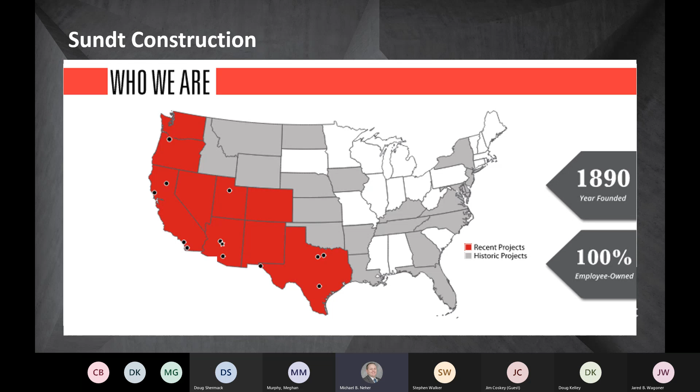Another tidbit about Sundt is that we are 100% employee owned. That's not just administrative personnel, but also down to our self-performed craft. All of our craft folk are also employee owners of the company.

Going through the agenda: first we'll go over the safety share. One of Sundt's primary goals and main attributes we pride ourselves in is our safety program, so we start off every meeting with a safety share, hoping to bring you something you've maybe not heard before. We'll do a project overview to give everyone a download of what the project is, go over the project schedule, the bid schedule and bidding opportunities related to today's topics, instructions to bidders and exhibits and attachments that will go out at bid time. We'll briefly discuss the best value approach, since a few scopes on the project are best value instead of low bid. We'll go through seismic design requirements and delegated design, then a detailed review of divisions 4 through 14 as well as 41, and then open up the forum for questions and answers at the end.

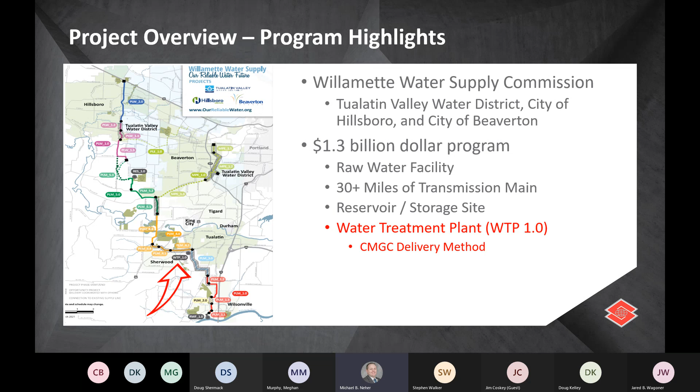An important fact about this project is that one of its main purposes is to provide a seismically resilient design to withstand a major seismic event. So in the event of a large earthquake, this plant is to remain operational, or able to resume operation within a very short period of time, ensuring that we have clean water being distributed to the public. This location was strategically chosen due to the stable basalt or granite bedrock that exists in this area.

So for any trades that have to do work in the ground, excavations or anything like that, blasting will most likely be required, and that's all reflected within the geotechnical report as well as the contract documents. This is a greenfield site, heavily forested, so one of the first things the civil contractor will have to do is deforest everything, getting all the vegetation out of the area to make way for our new structures.

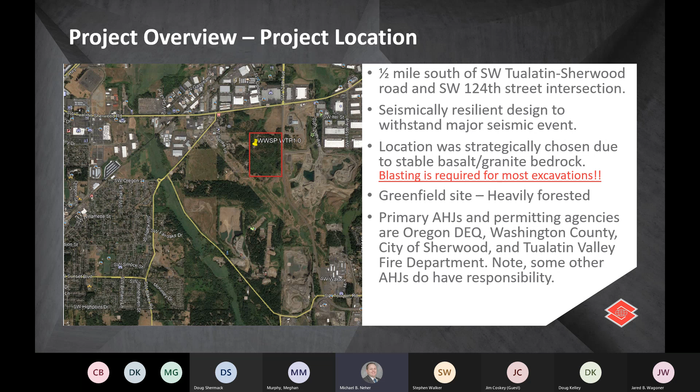The primary AHJs, or authorities having jurisdiction, and permitting agencies involved with this project are the Oregon DEQ, Washington County, City of Sherwood, Tualatin Valley Fire Department, and others. I just want to point out that there are some other AHJs that also have responsibility with this project, but you can see there are quite a few entities involved that we need to make sure we're accommodating.

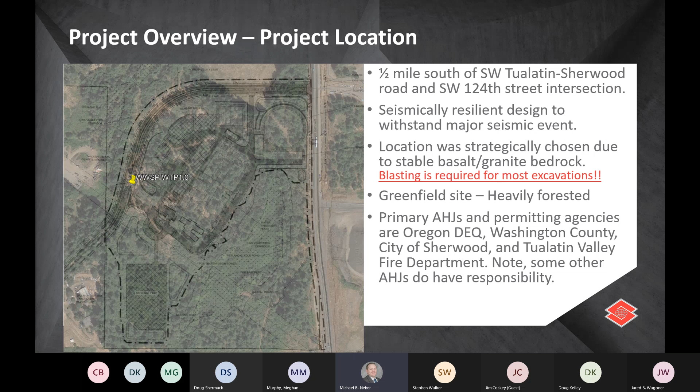So the project site overview. On the slide shown earlier, this is really the meat and potatoes of the project. Like I said, it's a greenfield site, approximately 23 acres that will have to be cleared and built out. There are multiple treatment areas, and there exists a 15,000 square foot administration building with Class A office finishes.

There's approximately 40,000 cubic yards of structural concrete being placed on the project. Earthwork quantities include 65,000 cubic yards of cut and fill on the job, 180,000 cubic yards of structural excavation, and 120,000 cubic yards of pipe excavation. As mentioned earlier, all of that has to be drilled and blasted to remove that material.

There is about $20 million of process equipment that will be purchased by Sundt and then turned over to the installing contractor to install—that's the large round structure in the picture. There is also the clear well, a 10 million gallon pre-stressed concrete reservoir.

There are multiple pre-engineered metal buildings on the campus, which in all of this scope provides multiple building trade opportunities for basically the scopes that we're talking about today, 4 through 14 and 41.

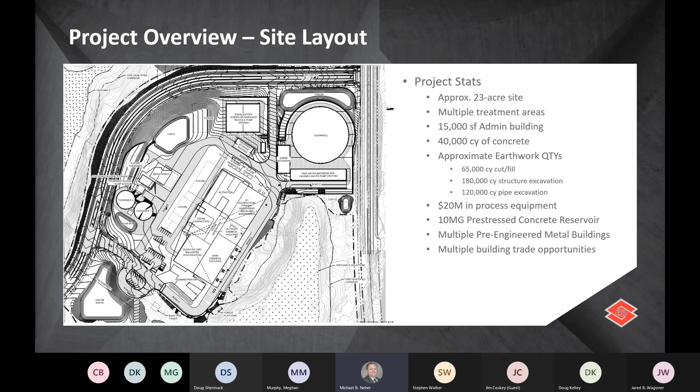Zooming in a little bit more, this is the main process structure. It's the largest structure on site and incorporates multiple processes under one roof, I would say. It's all one connected structure.

On the far left-hand side there is the administration building. As I mentioned earlier, it's a Class A office space that incorporates a locker room, showers, a laboratory, meeting rooms, office spaces. The structure itself is a structural steel skeleton with metal siding and metal roofing, and it also has solar panels on top of the metal roofing.

On the bottom in the center there, the main chemical area, that is where all the main chemicals are stored for the project, and from there it's distributed throughout the campus. Chemicals are used for different parts of this process.

The outdoor chemical facility, again, is just another area where chemicals, basically the liquid oxygen and other gaseous chemicals, are stored there and then distributed from there.

Up in the upper left-hand corner, right next to the administration building, is the ballasted floc. This is the first structure where the water from the Willamette River will come into, and from there chemicals are added to be able to segregate out solids, as we call it, within the water.

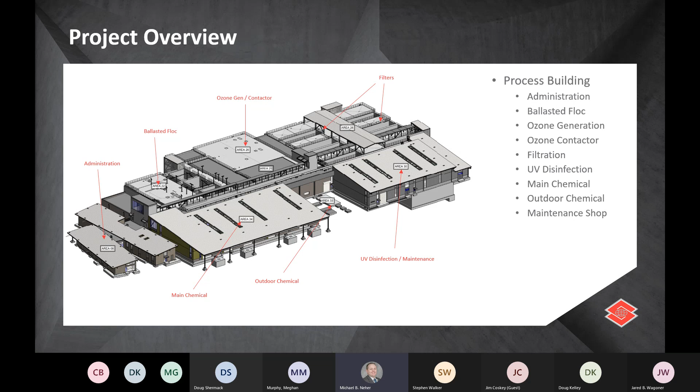And then from there, it goes into the UV disinfection. Again, this goes through UV bulbs where UV light is cast across the water, and that UV process again helps with disinfection.

This picture shows the same 4 structures, just from a different point of view. So I'm going to talk specifically on the left picture here. On the bottom center there is the equalization overflow basin. This is really 2 concrete boxes buried in the ground. There is no lid on it, so it's open to the air, but really it's meant to hold finished water in there to be able to help equalize the system as a whole.

On the right-hand side is the equipment storage building. That is one of the pre-engineered structures, and really it's just meant for equipment storage and chemical storage.

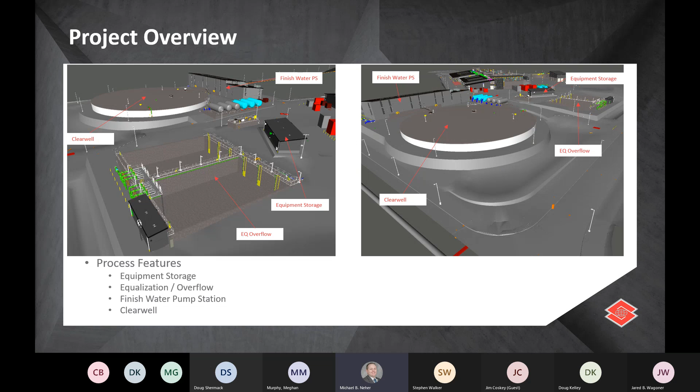In the upper left-hand corner is the clear well, the large round tank. As I mentioned earlier, it's a 10 million gallon pre-stress tank. And on the top right is the finished water pump station, and that's where really the finished product leaves the plant and goes to the transmission line out to the public.

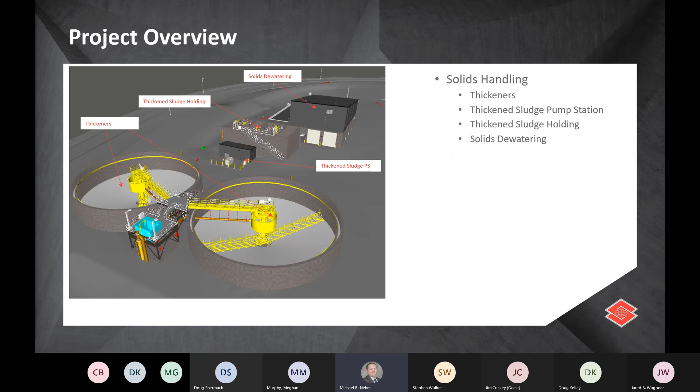And then the solids dewatering, which basically is where they squeeze any water that's available within the sludge or the solids. It squeezes out the water, and the solids then get trucked off site.

All right, project schedule. This is a very high 10,000 foot view of the project. We're expecting to be able to put a shovel in the ground come first or second quarter of next year.

And we have a fairly lengthy civil scope that will take a couple months to get going with drilling and blasting and making ready for concrete to begin. So we expect about 4 or 5 months into starting the project when concrete will start.

As you can see here, this is kind of the flow of a typical construction project, starting from the ground up. So most of the architectural type work we're expecting to start in the second quarter of 2023, as well as the structural steel and miscellaneous metals.

And then from there, really just closing out the project, starting it up, and making sure that everything functions correctly. Milestones for the project currently require us to be fully commissioned and started up in March of 2025, for us to be able to start pushing clean water out through the distribution systems.

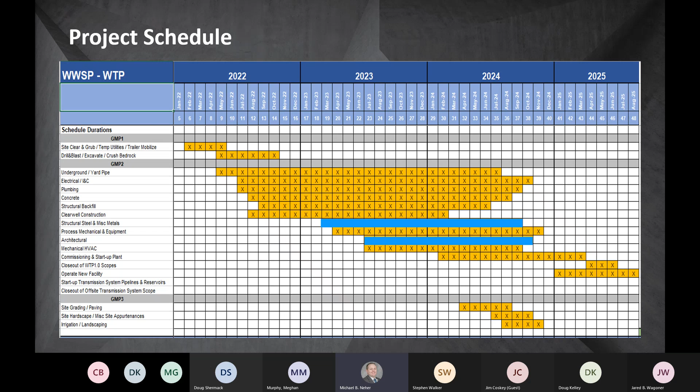So, bid schedule and bidding opportunities. This project right now is being released in two packages. We call them GMPs, or guaranteed maximum prices. The first package, which is about 95% of all the scopes, so all the scopes we're talking about today, will fall into this category of GMP 2. We're expecting to advertise early to mid-October, with a pre-bid kickoff meeting in late October, and bids due in mid-December.

GMP3, which bids out in 2023, is really landscaping and final touches, yard work that needs to happen at the very end of the job. But like I said, all of the architectural scopes we're talking about today are going to happen in GMP2.

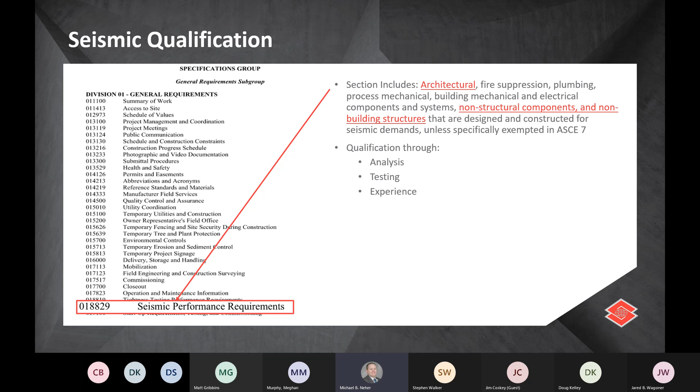So really, as mentioned earlier, there's quite a few scopes. Most of it is related to the process equipment and process piping, but there are a few architectural items and non-structural components that will require some seismic performance design.

And then delegated design requirements - this doesn't necessarily mean seismically designed. It just means this is more of a deferred design, which is pretty typical for most projects. Jared, do you want to go ahead and explain this a little bit more?

Yeah, sure. So the delegated design submittals - I've got a short list here of the items required to be delegated to design. First thing to know is that they're designated to be design build systems, so all of the coordination that entails with it being a design build delegated design on these items. They do need to be stamped and sealed by a professional engineer from the state of Oregon.

Just a short list of the delegated design items - I scrubbed the overall list and based it only on the audience we have here today. We've got the interior and exterior steel framing for folks looking at the drywall. For the steel and miscellaneous metals, we have the stair and railing assemblies, as well as metal platforms, supports, and gratings, some fiberglass reinforced products, decorative formed metals, and some of the exterior paneling on the building.

Cross-laminated timber is a delegated design, roof accessories, equipment curbs, the aluminum entrances, glazing for the doors and windows, acoustical panel ceilings. Metal building systems are delegated design - that's pretty typical. Bridge cranes and the monorail hoists as well.

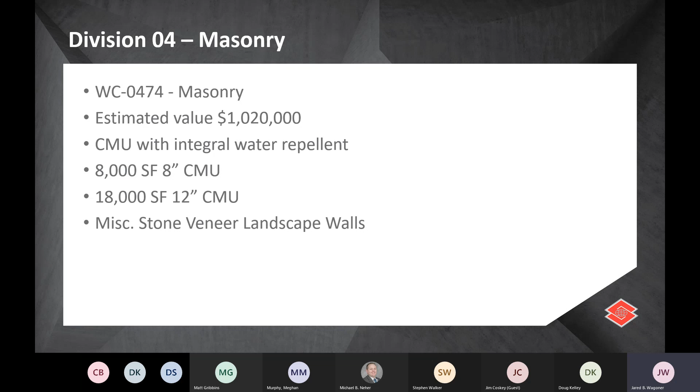So a lot of what we have here is within the process building. We have some pony walls inside the building, cordoning off specific areas - different administration or process areas - with CMU walls, and a couple exterior walls as well with CMU. The CMU block with exterior facing needs to have an integral water repellent in it.

For the Division 5 work, which is our miscellaneous metals and structural steel, that'll be packaged together, also under one work package for the whole division. Estimated value for that is about $12 million. You can see some of the quantities on there.

The majority of the structures in the project are concrete walls, so what we're seeing here is the structural steel and decking to form the roof and ceiling structures for these buildings. We also have quite a few stairs on the site, a total of 70 flights of stairs, and we'll also have pipe supports, some pre-engineered pipe supports that go into the structure.

Handrail, 4,500 lineal feet, a mixture of both standard aluminum handrail as well as some decorative handrail for the job site. And inclusive of that miscellaneous metals and structural steel scope, we have the ladders, the roof ladders. There's some grating, anchor bolts, plates, canopies, and other miscellaneous metal plates, closures, and embeds throughout the job site.

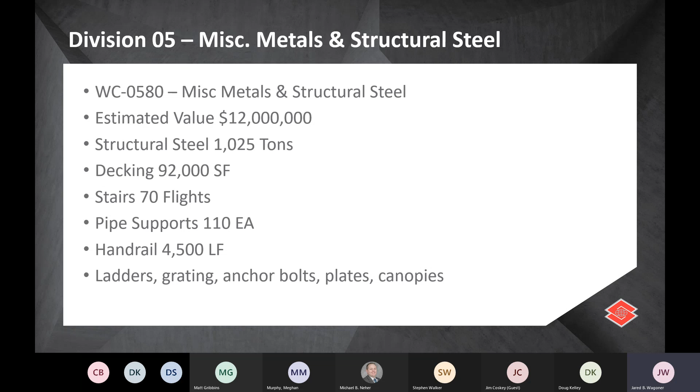Under Division 6 for woods, plastics, and composites, that's going to be grouped under two different work packages, one for CLT panels and one for FRP. The screenshot on the right shows the CLT panels, or cross-laminated timber panels. So that 15,000 square foot administration building we were talking about at the beginning - the structural ceiling structure is going to be a cross-laminated timber panel system, and that's the area we see in blue as CLT panels.

And then the FRP - there's a couple different areas, significant areas on the job site with some FRP components included in that.

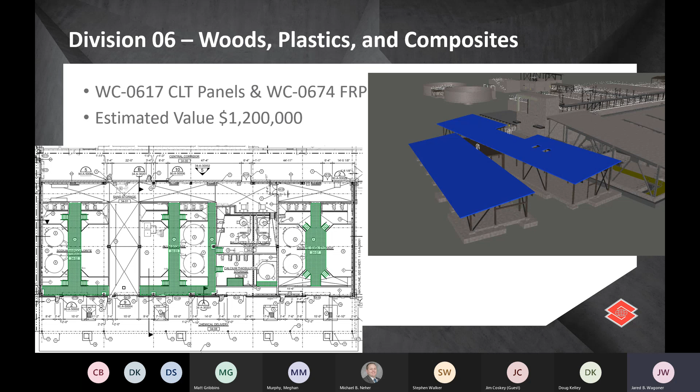The area on the bottom left-hand screen is probably the more significant area of FRP. There's some FRP walkways, grating supports, and stairs within the main chemical area. This area has a lot of caustic chemicals that will be used when the building's in operation, so a lot of the construction in this area needs to be FRP to handle the environment it's going to be in. Estimated value between these two packages is about 1.2 million between the CLT and the FRP.

For Division 7, thermal and moisture protection, this is going to be grouped under 5 different work packages: damp proofing and waterproofing, metal roofs and wall panels together, PVC roofing, caulking and sealants, and expansion control.

There's going to be a lot of trim and components to get this roof system pulled together for this structure. We've got about a $6 million value estimated for the Division 7 work, and some significant coordination to make sure we get this roof structure pulled together correctly across all these different buildings.

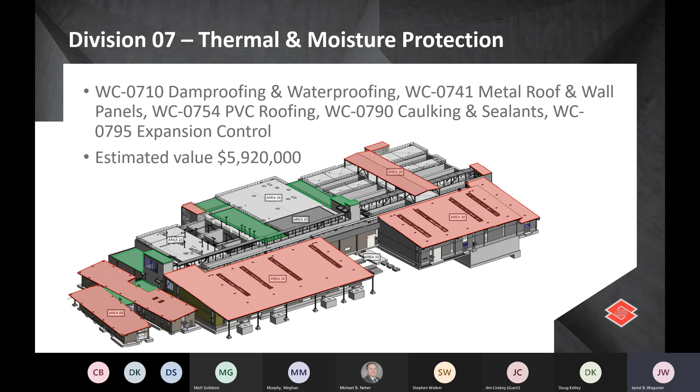I also want to point out that the work category for metal roof includes the wall panels. The sides of this administration building include box rib metal siding in a number of different areas, which is inclusive of that work category 0741 scope.

Moving over to Division 8 for openings. We're going to break this CSI division into 3 different groups. We've got doors and hardware, which includes the hollow metal doors as well as the FRP doors. Like I mentioned before, that main chemical area requires FRP for the majority of its components to withstand the environment inside that room. We've got doors and hardware, overhead doors, and some aluminum frame entrances and storefronts. Total value of those 3 together is about 1.8 million.

26 of those aluminum entrances, 85 of the hollow metal, and 9 of the FRP entrances. And then we've got 30 overhead coiling doors on the job site, which are galvanized, powered overhead coiling doors.

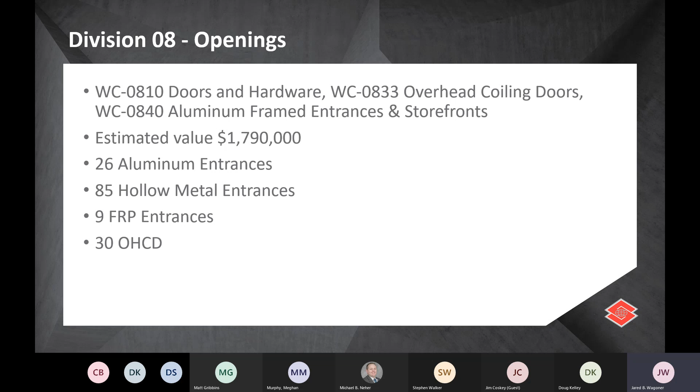For finishes, Division 9 is broken up into 5 different components. We've got gypsum wall boards, which includes the interior framing. We've got acoustical panel ceilings, flooring, sound absorbing wall units, and painting. It's that last one, work category 0990 painting, which is going to be a best value selection. Those 5 work packages together come out to just north of about $6 million or so.

The reason painting is going to be a best value selection is there's a number of different areas. Some of the chemicals that are going to be used on the site are damaging to concrete, so they require a chemical resistant coating that requires experience having placed these coatings down in the past. Some of them are very sensitive in their placement methods, so that's going to be a best value selection for painting.

Flooring on the site - like we mentioned, that administration building is a Class A office building. We've got a number of different flooring types, including resilient sheet flooring, rubber tile floors, some areas with carpet, ceramic tile, and floor tile in the bathrooms. There's also polished concrete inside that administration building, so a couple different flooring types in there.

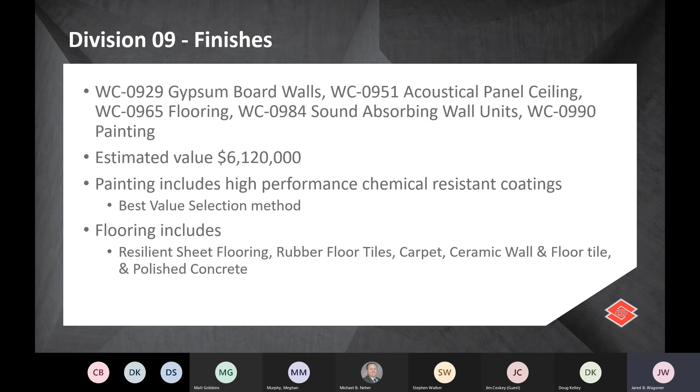Moving over to Division 10, this one's split up into quite a few different work packages when we start talking about specialties. A lot of smaller scopes on these specialty items, so not a significantly large value in comparison to the other scopes on the job, but there are some scopes in here that are maybe enticing to some smaller businesses that maybe want to pick up some work on the job site. So there's a couple smaller packages here.

The screenshot that I have down there is a sign on the exterior portion of the job site, displaying on the exterior wall the plant identification. So there's some high visibility product, high quality product that's going to go onto the exterior for this thing.

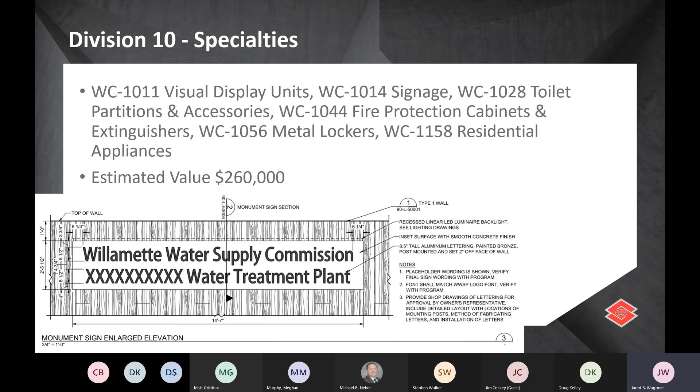All right, Division 11 and 12 is a fairly small scope of work in comparison to some of the other stuff. In Division 11, we have the work categories for residential and laboratory appliances. Within the break room of the administration building, that's your typical refrigerator, microwave type of stuff. Inside the laboratory, there are specialized appliances like glassware washers and explosion-proof refrigerators. That one has an estimated value of about $90,000.

In Division 12, window treatment, so your shades, motorized shades, and the casework contracts, which also includes the laboratory casework. That one has an estimated value of about $320,000 for the Division 12 work put together.

Division 13 is inclusive of just the pre-engineered metal building, so all Division 13 will be wrapped into one work package. All 3 structures will be under the same work category, 1300. We estimate that's got about a $500,000 estimated value. There are 3 main structures on site: the equipment storage building is about 1,800 square feet, the equalization overflow basins is 550 square feet, and the thickened sludge pump station is a 350 square foot building.

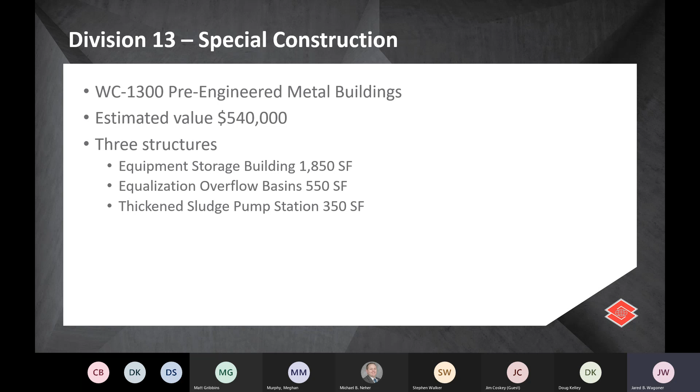Division 14, conveyance. We've got 2 elevators and a platform lift on the site, so that's going to be broken up into 2 separate work packages, one for the elevators and one for the platform lift, about $500,000 estimated value for those. For the 2 elevators, they are 4-stop elevators, so 2 of those stops are front facing and 2 are rear facing, meaning there's an opening on each side of the elevator.

The specification will allow the electric traction elevator or a hydraulic roomless elevator, and we'll make that decision based off of the pricing proposal we receive from our vendor. Whichever one makes the best sense from a cost competitive standpoint will work out for the job, so either the electric traction or hydraulic roomless will work based on the design of the project. And then there's one platform lift as well.

Division 41 is our last spec section, our last CSI division we're going through today. This is the material processing and handling equipment, and it's all captured under one major work package for cranes and hoists. That one has an estimated value of about $400,000, comprised of two 15-ton bridge cranes, one 5-ton gantry crane, and two portable davit cranes. Those davit cranes have a number of additional bases installed throughout the job site, wherever we need to get the davit crane placed for the operator's usage, so they're able to move it around and install it at different structures and operate it.